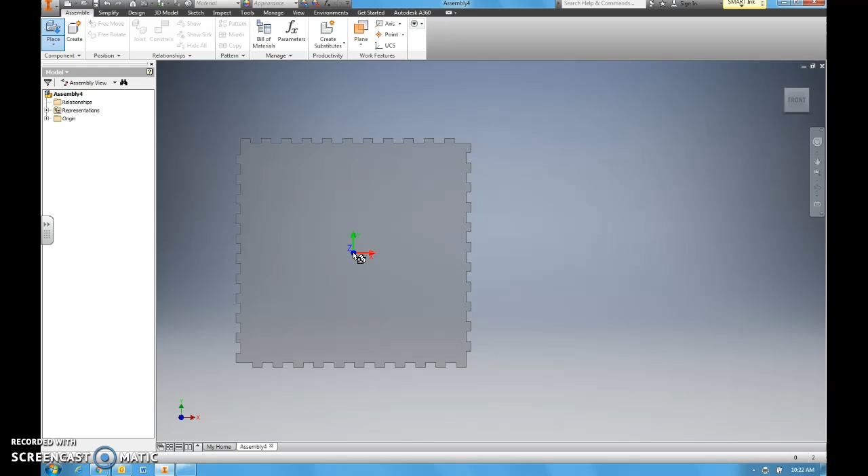I'm putting together Miss Makins' file, and you'll see your cursor turns into a placing agent, so you've got the Y, X, and Z. You may wonder what we're placing since nothing shows up, but that's because the file is a little too big. So I'm going to scroll with my mouse wheel to get it into a format I can see, then drop it on the screen by clicking. It immediately wants to drop another one, but I don't want that, so I'll hit escape and keep going.

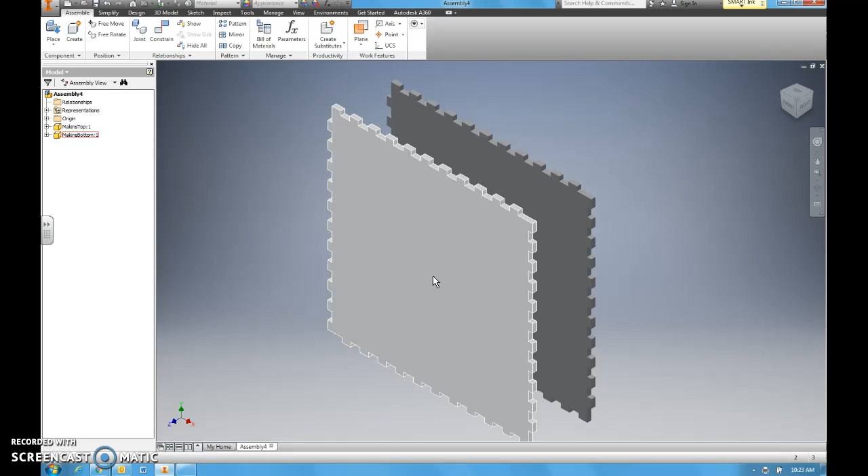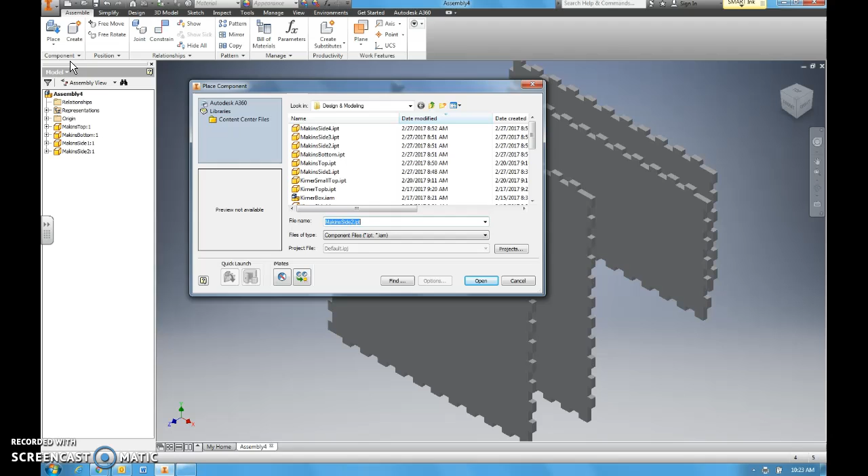I've got five more files to go. Now I'm going to find the bottom: open, place, escape. Side 1: open, place, escape. It doesn't matter where they are right now. Side 2: open, place, escape. Side 3: open, place, escape. Side 4: open, place, escape. Now I have them all there, and I'm going to switch the view with the cube in the upper right hand corner to front so I can pick them up and move them around.

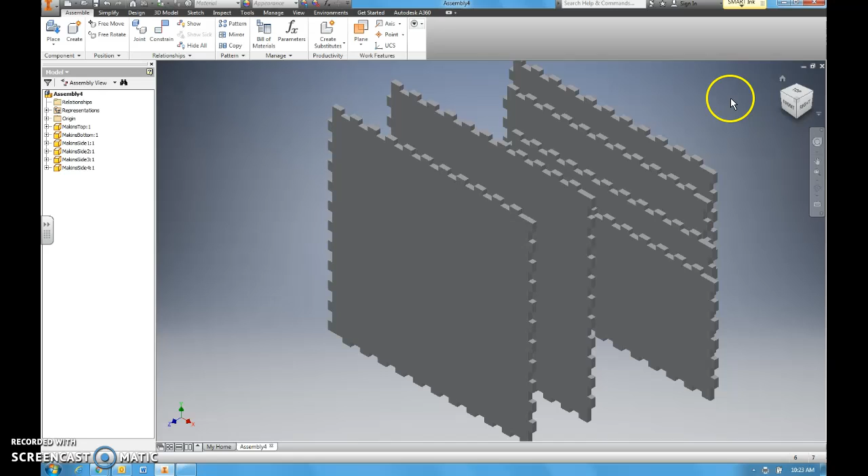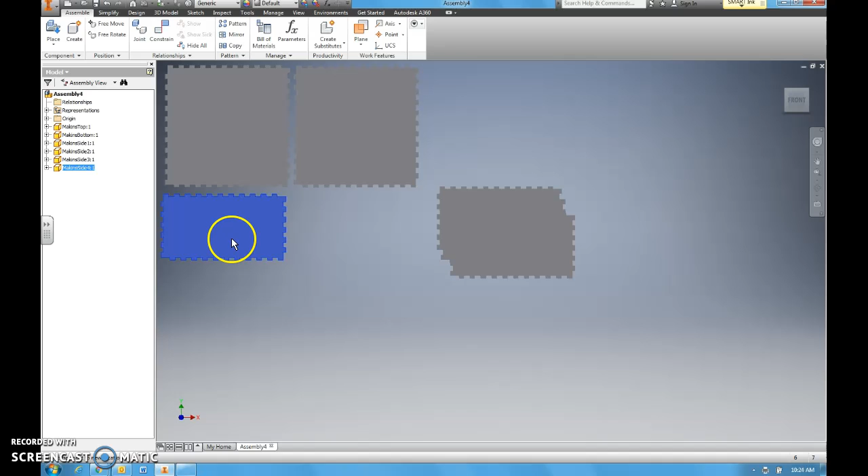Now I want them set up in a format I can actually use on the laser cutter, which means they need to be placed close to each other, but not touching, just like this. You'll notice they're close, but not touching. And then I'm going to get this one right here, and this one right here.

Okay, so we've assembled a file, and I need to save it. I'm going to go up to the big I, save as, and we're going to save it as an IAM file, and I'm just going to call it Makins Box. Save.

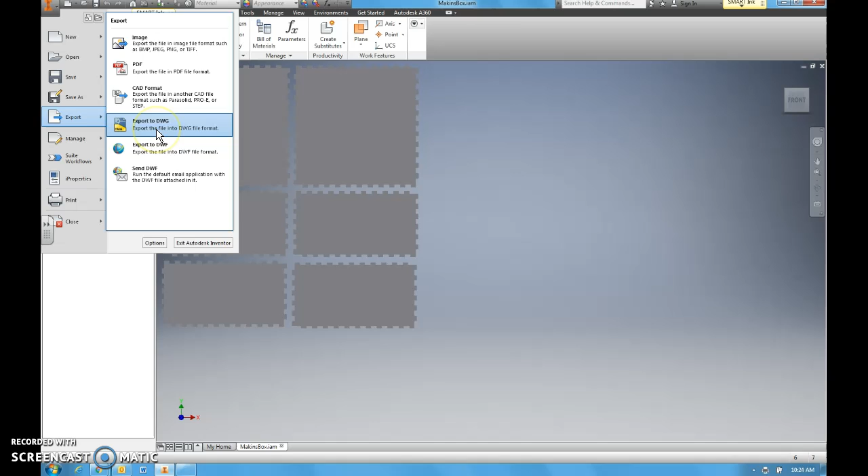Okay, so the file is now assembled, but still not in a format I can use on the laser cutter. So we're going to export it into another type of file. You go to the big orange I, click export, and export to a DWG, which is a drawing file. We're going to save it as Makins Box DWG, still saving it in your school login folder.

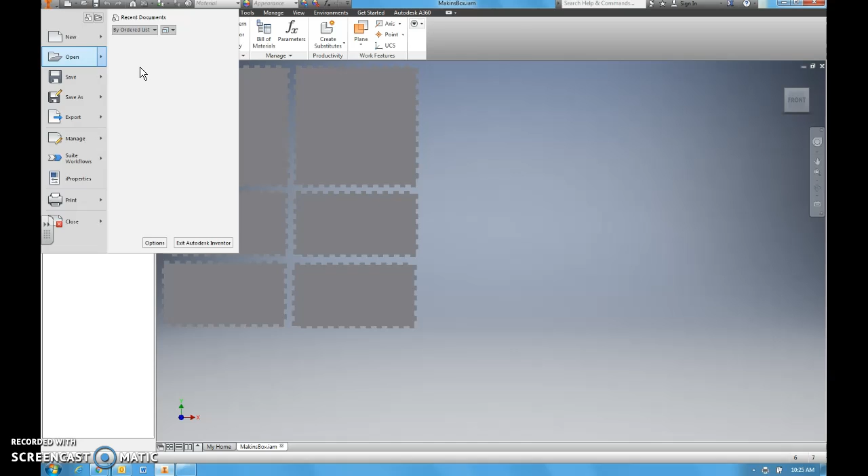Save. And then we've got to go and open that file. I'm going to go back up to the big I, open, and we're going to open a DWG, Makins Box, open, and here we go. We've got to tweak it a little bit and change some settings so we can finish it out.

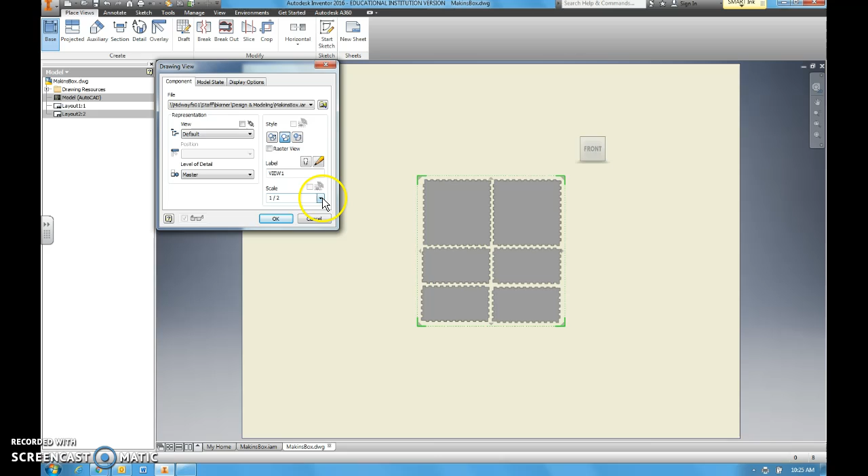The first thing I'm going to do is choose layout 1-to-1. You may say, but there's nothing there. Well, that's because we have to choose our place view in the upper left hand corner, and we're going to choose base. Now you see it. However, it's in half scale, which means it's half the size we want. We actually want it 1-to-1, which means it's exactly the size it's supposed to be. We're going to hit OK.

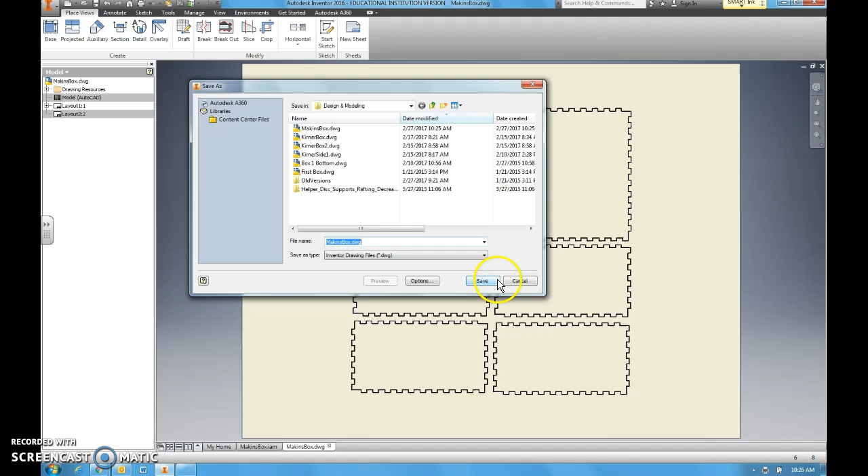Now I want to go ahead and save this. So File, Save As, and we're going to save it as a drawing file. Say yes. Oops, it really doesn't want you to do that, so I'm just going to click Save. Okay, there you go, that works too.

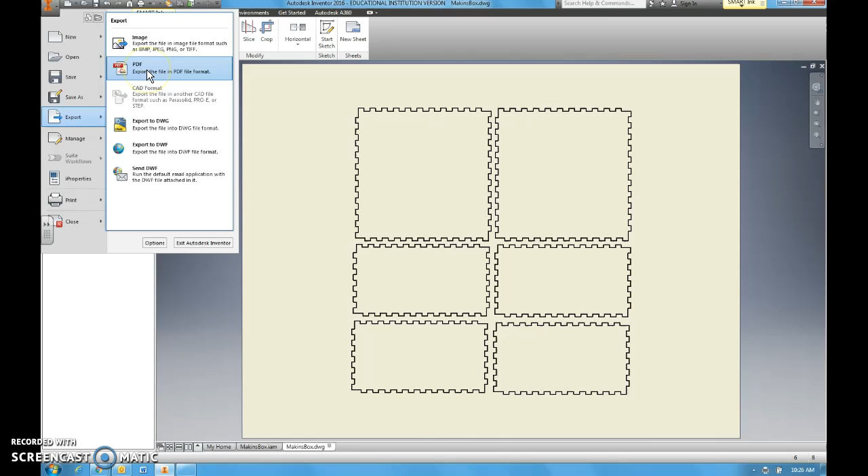The final thing we need to do is convert it into a PDF file. Go back up to the big I, and click export. You'll see the option to export the file in PDF format. I'm going to click export and PDF, and you'll see MakinsBox PDF, save it in your school login folder, and click save. Then the Adobe Reader should pop up and your PDF file is there.

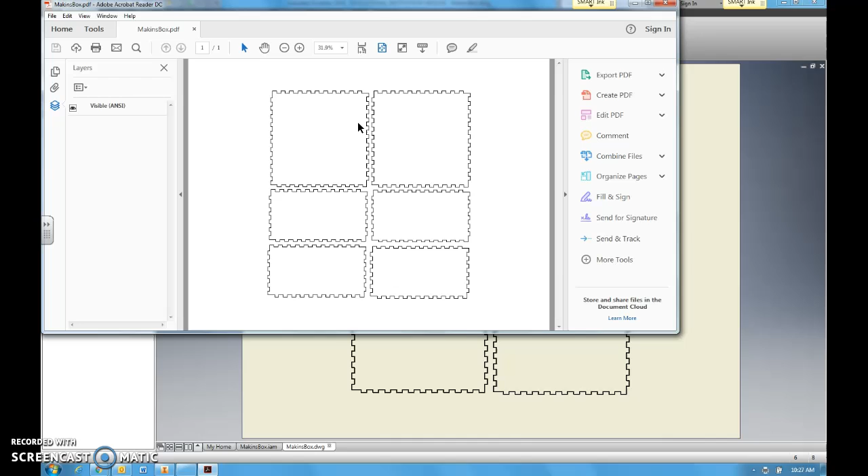This is actually the file that I need to have emailed to me as an attachment. So the very last step in order to turn in your project is to send me via email a PDF, and it needs to be sent to bkerner@parishepiscopal.org. So thanks, and I appreciate you going through this, and I can't wait to print your boxes.